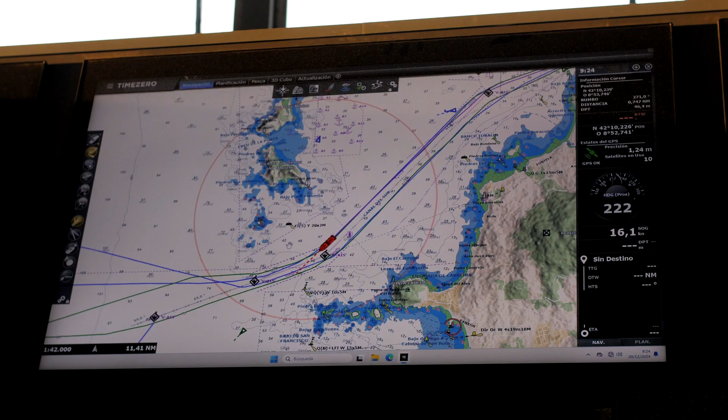A story is usually told starting from the beginning, but sometimes it's better to start from the end. These are some of the vessels that recently came out of our shipyard.

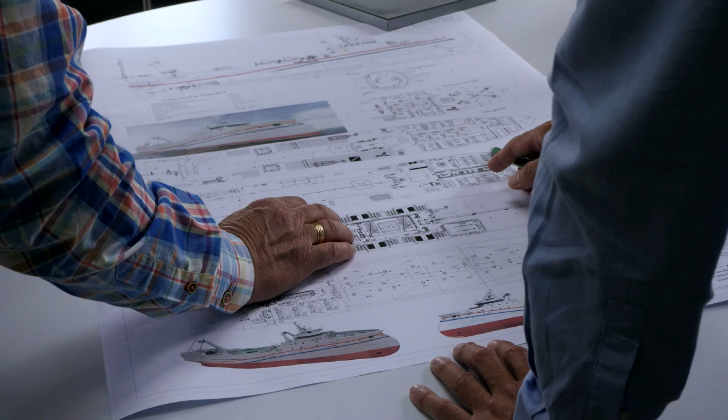Over more than 50 years of experience, Nodosa Shipyard have built more than 300 ships. They're built with the quality, technology and experience of a great company.

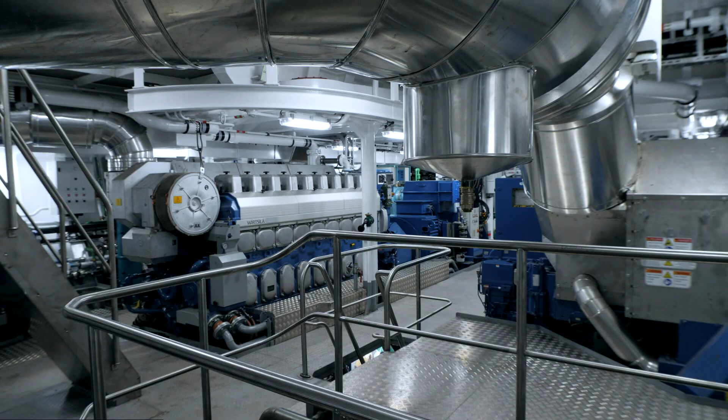Let's go back to find out more about us. We invite you to tour our facilities and divisions to discover more about our company.

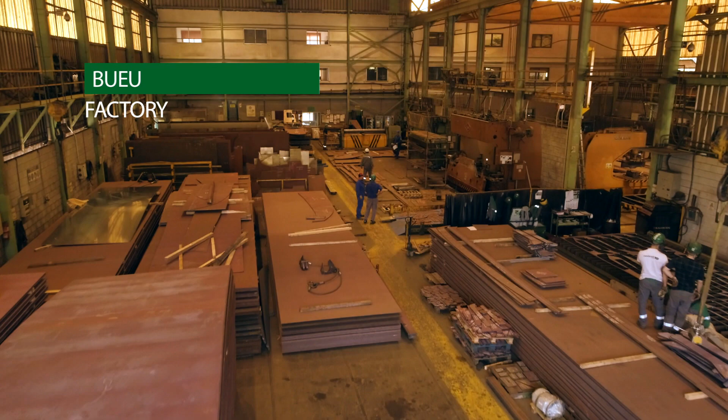We are located in Galicia, northwest Spain. We have 3 production sites along the estuary of Pontevedra. The factory is in Bueu, the shipyard in Marín, and the mechanical workshop in Pontevedra.

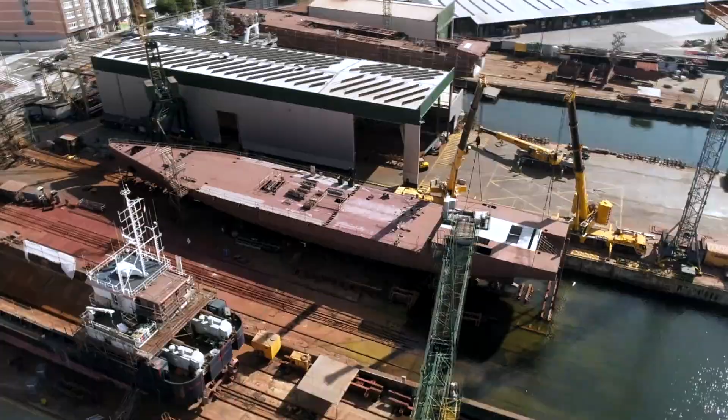When someone asks us what we do, our first reply obviously is to build, maintain, repair, and modernize vessels. But we do more than that. We actually make our customers' dreams come true in the shortest possible time.

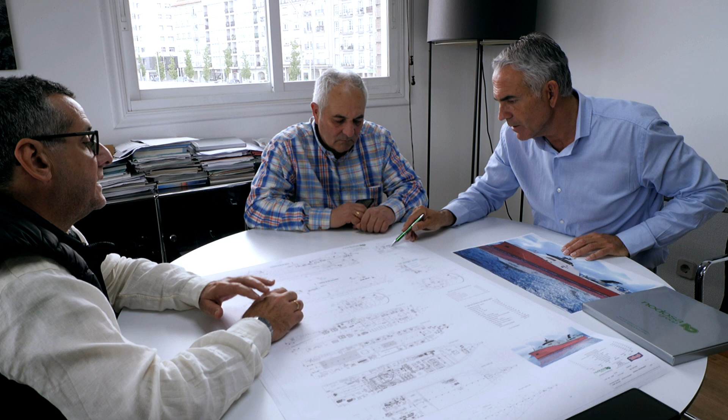People at Nodosa strive to do it to the best our client has ever imagined, regardless if it's building or repairing ships, adding all the time a plus of quality, commitment and innovation.

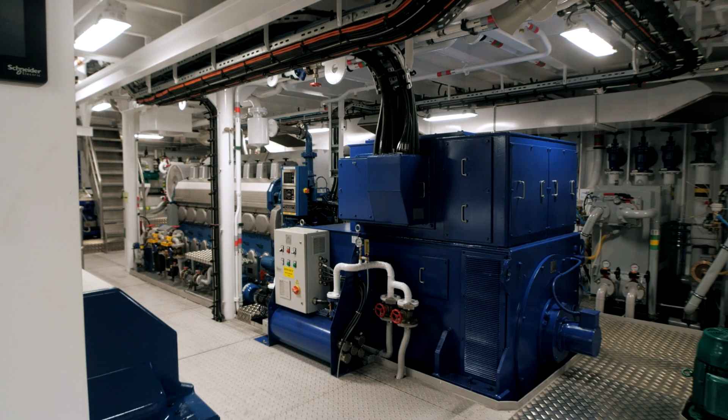We do all of the processes at Nodosa, from designing and engineering a vessel made of aluminium or steel to its complete construction and delivery.

Repairs can also be carried out at our facilities, both on the slipway and afloat, or even anywhere around the world.

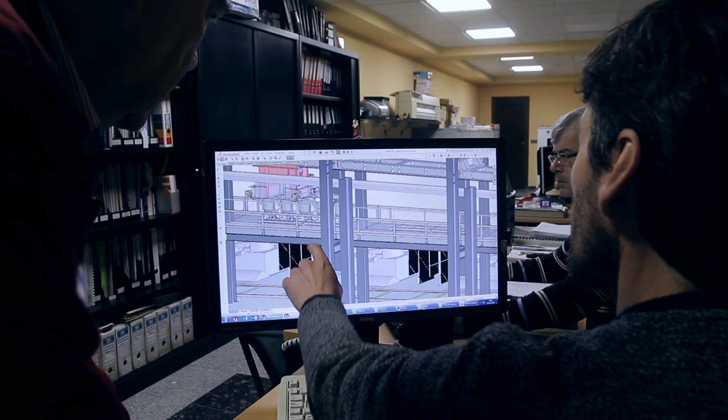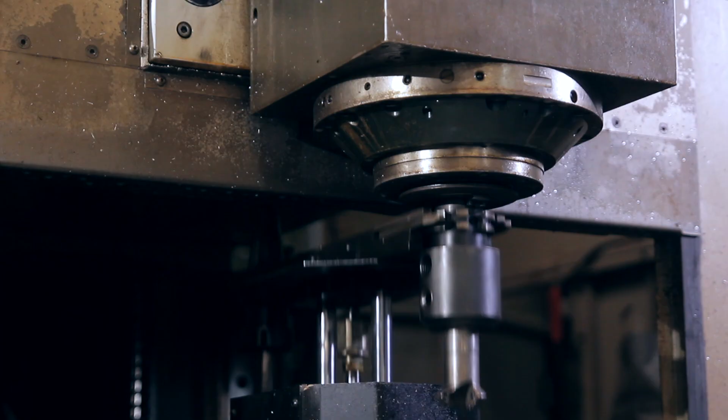On the other hand, our industrial division at Nodosa Group complements the naval one, providing solutions to many other industries such as granite, oil, wind power, or aeronautics, always with the greatest efficiency and absolute reliability.

As you can see, the versatility of our services spans over a broad range, always caring that we maintain our company's standards, which are quality, an added value for the company, and a question of reliability for our clients.

The most prestigious international certifications on the matter say so, not us.

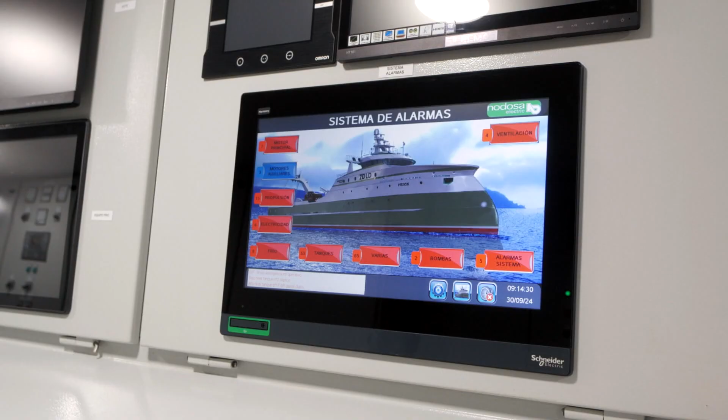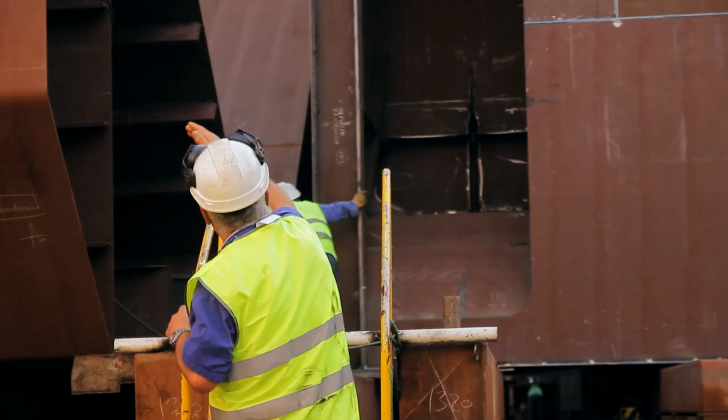Safety is always our focus as we aim at minimizing risks during production processes. That's the reason why we have our own safety department, but nonetheless hire external services supported by the corresponding certifications to deal with occupational health and safety items.

One of our priorities is to take care of and preserve our environment. We follow the most comprehensive norms in environment management.

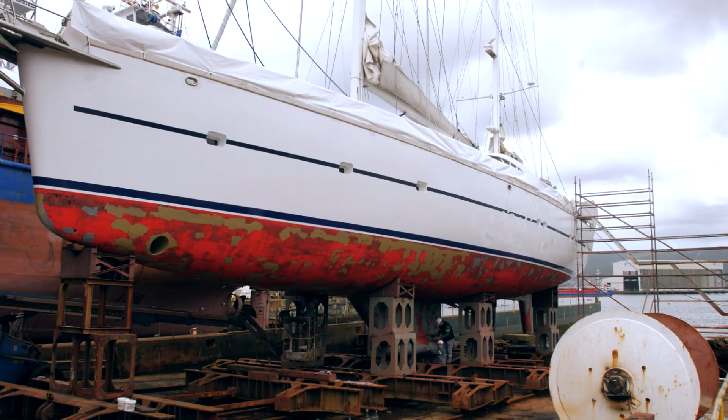Pushing it one level up, we brought our structures for quality, environment and health and safety together to create a single global quality management structure.

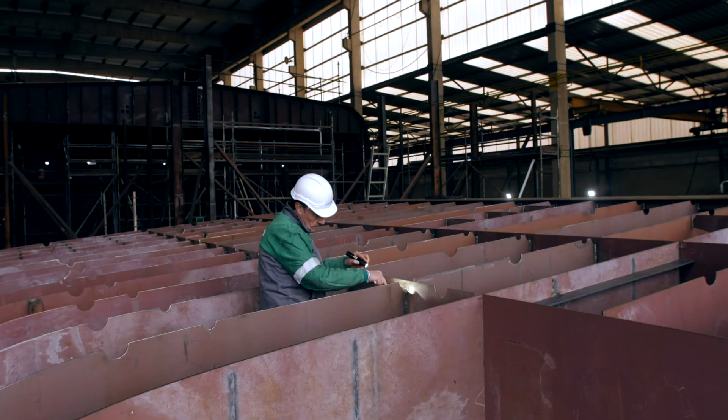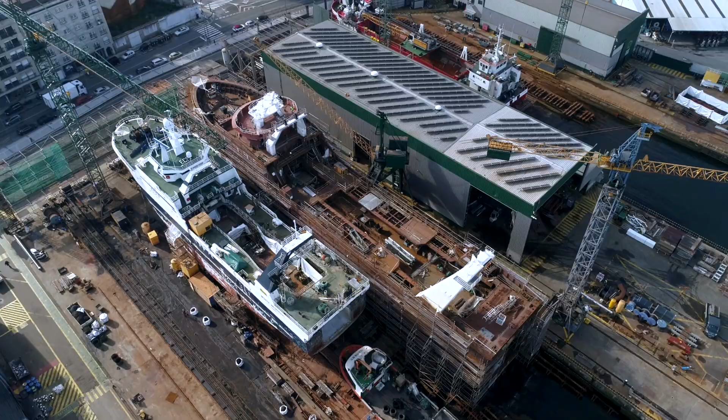Our R&I department is always seeking solutions for the incoming market's needs. The naval and industrial fields never stop innovating, and we move forward with them, always striving to be a step ahead. It is both thanks to our long trajectory and to our constant evolution and the capability to face great projects that we are a reference in the naval field.

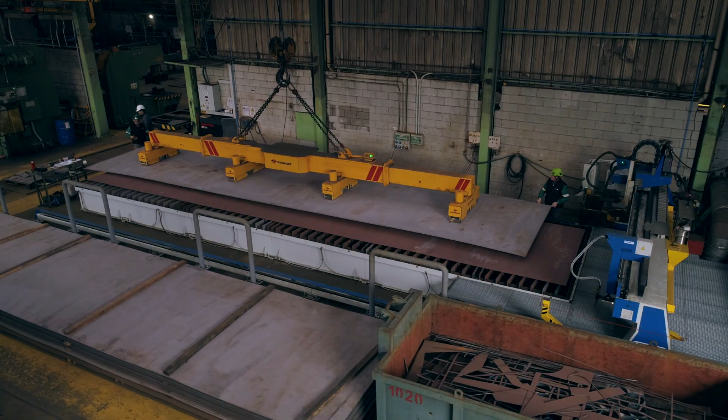As we pointed out earlier on, we have 3 main production facilities in the estuary of Pontevedra. Material is stored, classified and cut at the factory.

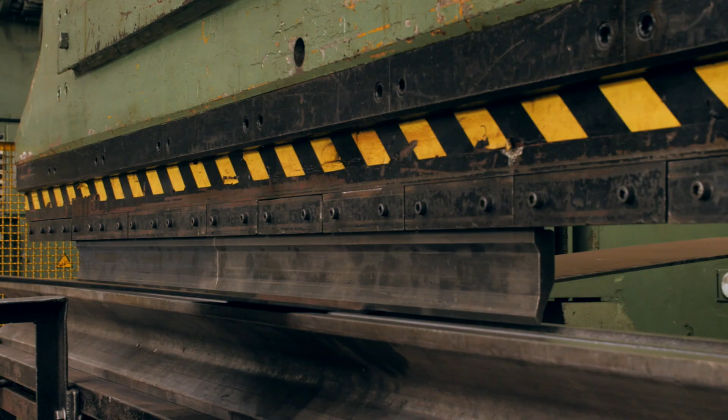Oxy-fuel or plasma cuts are used. That's where we pre-bend it and do a lot of metal manufacture, boiler works and blocks processes. We also build there some small vessels.

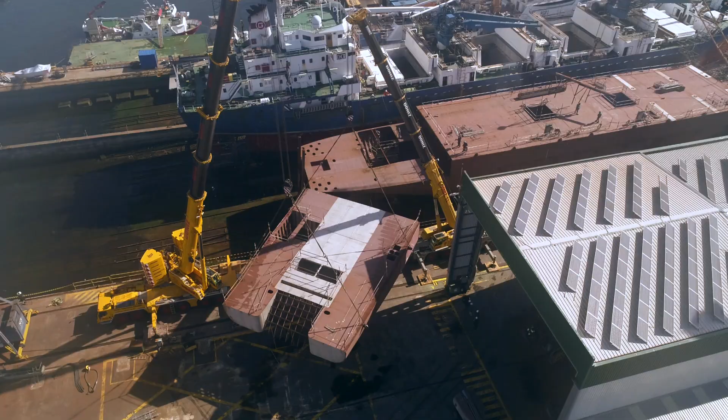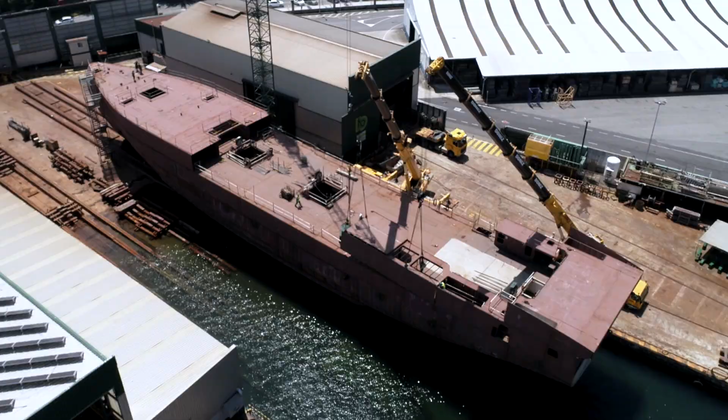At the shipyard, we have a big working area with different warehouses by the docks, 6 slipways, one of which converts to a dry dock, and several quays to perform all of the processes from construction, assembling and pre-installation of all the equipment on the blocks to the completion of the final result, launching and delivery of the different vessels.

Our technical and engineering department, one of the most equipped and prepared in the field, looks after every detail in all processes all the time.

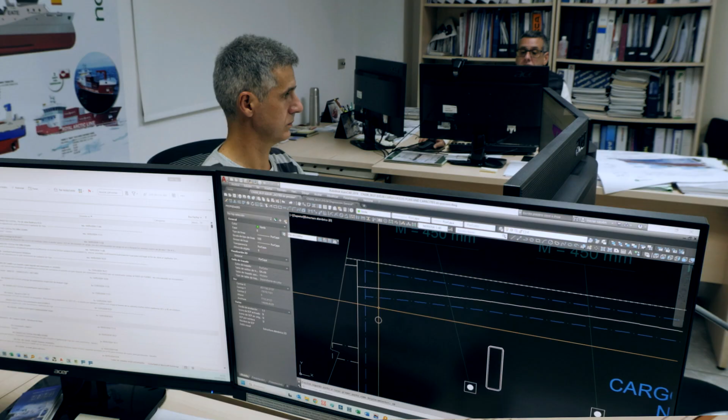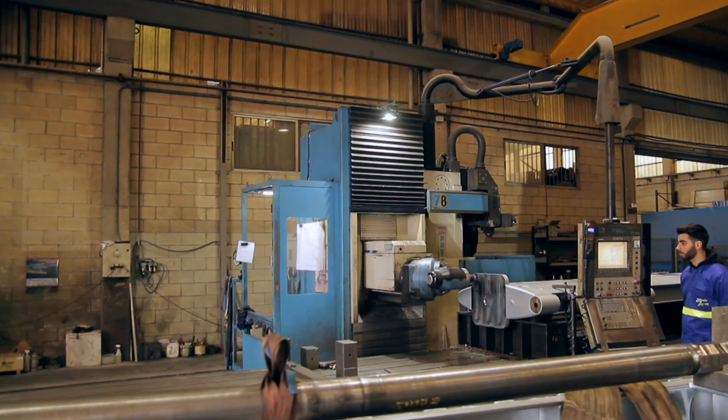Our mechanical workshop lets us provide all kinds of assistance, from horn manufacturing, propeller or rudder shaft manufacturing, to the mechanization of all kinds of pieces and ship's elements.

With this global plan, Nodosa has all the required personnel and guilds to develop a complete service for our clients.

At this point, you already know the wide infrastructure available at Nodosa, but you may be wondering what type of vessels we build: tugboats, rescue vessels, port services boats, dredgers and workboats, multi-function vessels, offshore, oil platform support and supply vessels, all types of fishing vessels, cargo vessels, mega yachts and special sailing vessels, ro-ro, ferries, passenger vessels and submersibles, auxiliary vessels.

As you can see, a wide catalogue that shows diversification in our production and our experience in the field.

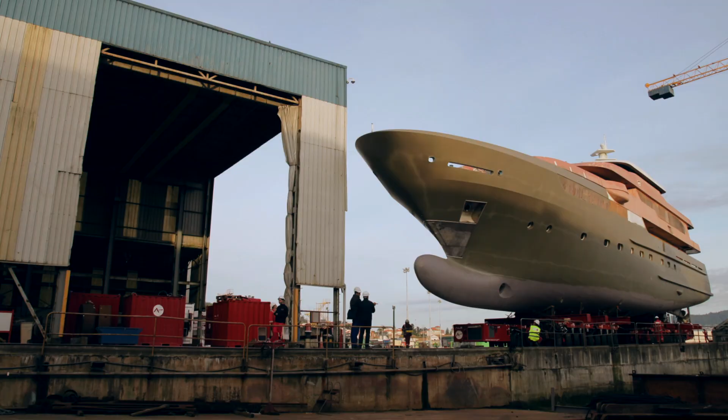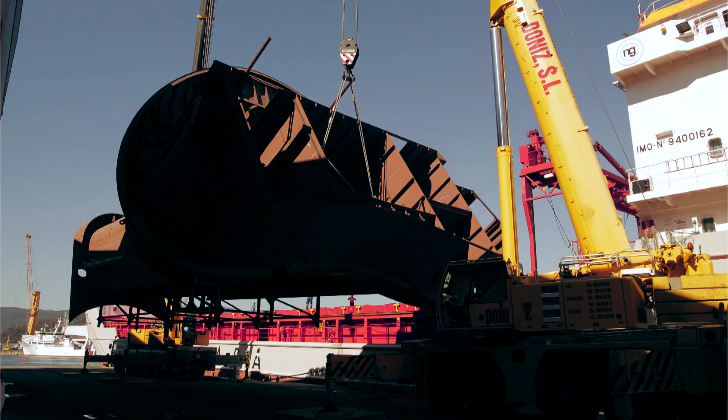We must also say that Nodosa builds ships for other shipyards too, which shows our competitiveness, maximum quality and reliability, regardless if it's the specific block, a part of a ship like the hull or the superstructure, or delivering a turnkey vessel.

Did you know that more than 150 ships on average come to our shipyard each year for maintenance, repair, refitting or upgrades, always providing our good know-how to each job?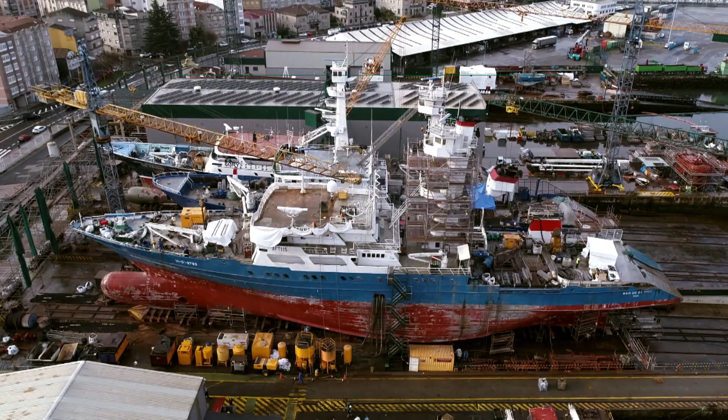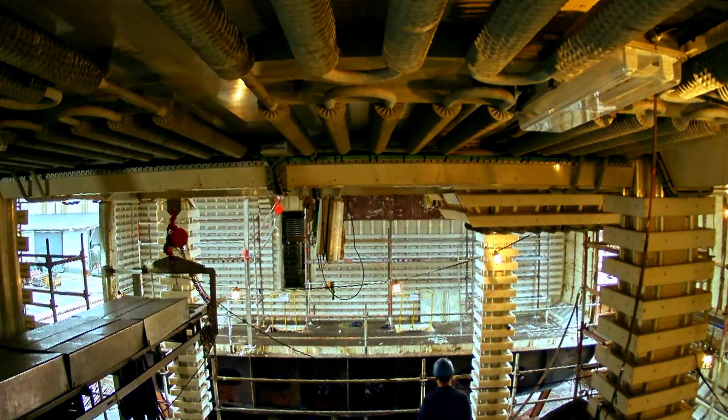And here we have to mention one specific kind of intervention that makes us feel especially proud. We are the Spanish shipyard credited with more lengthenings on all kinds of ships than any other.

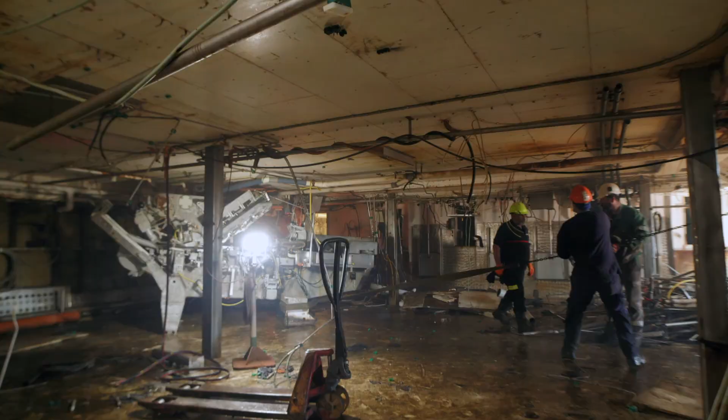Don't forget that we are open for business 365 days a year for our global naval maintenance services, always striving to provide fast and reliable solutions in Marín or anywhere around the world.

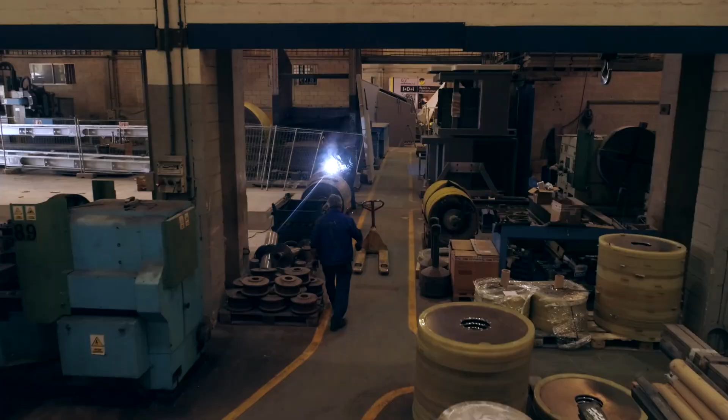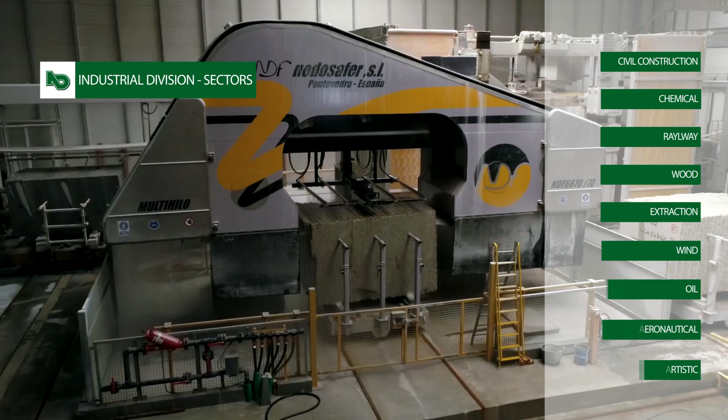Our industrial division provides solutions for different fields: chemical, mining, oil, wind power, rail, wood, civil construction, arts and crafts, and above all the others, granite, as we produce the most cost-effective granite cutting machines in the world of our own design and patent.

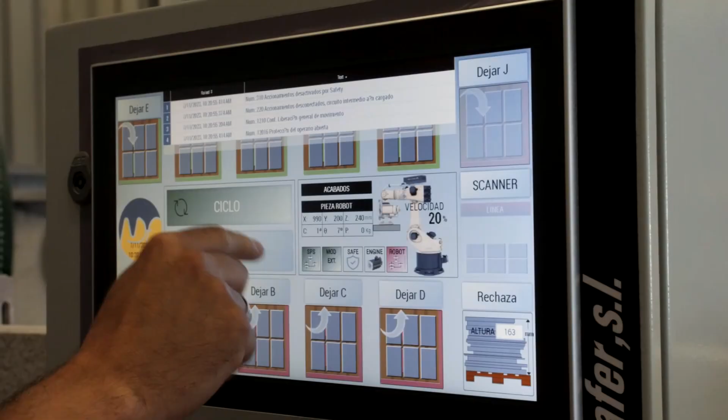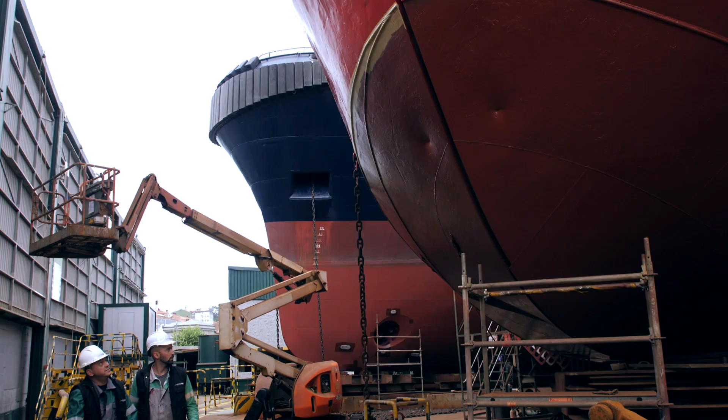After this tour around our facilities and the processes developed in them, it's been shown how experience, quality, production capacity, cutting-edge technology and innovative way of thinking back us up in what we do.

We have been proving it for more than 50 years, but for us, that's not enough. That's why we strive to improve every day, to provide the best service to all people who trust us.